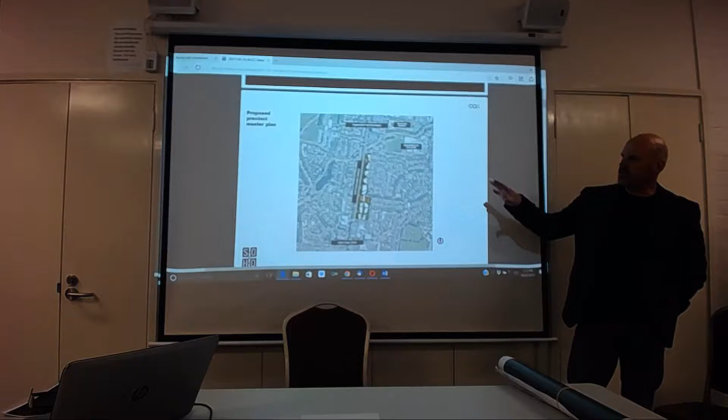The land was bought at auction last August, and we're working up the estate development plan and the first stage development application. Tonight we're here to give you an understanding of where we're at in the process, some time frames, the key elements of the proposal, and we're happy to take questions, probably best held to the end. We'll start with our development intentions plan.

We've consulted on this reasonably broadly - we've had a few community consultations and public presentations at the Pavilion, the last just last Wednesday night, and we presented to the council at a closed forum earlier in the year.

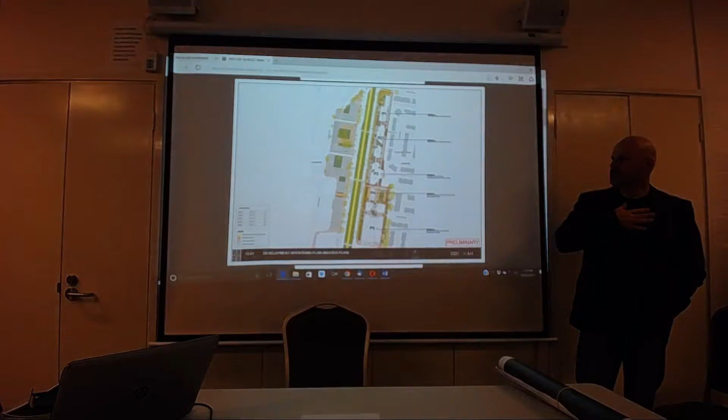The context for this planning is a relatively unique one - we're a bit ahead of some of the policy and aspirational changes the Territory is currently proposing, which brings complexities to how we put the proposal together, particularly regarding stakeholder engagement.

We're working through the Office of the Coordinator General, a bit of a different way to go about things, consulting broadly with all the Territory departments and also the NCA. What we'll show tonight has been through that process for about 6 months, culminating in a proposal we're putting together to lodge around the end of next month, the end of June.

At the end of June we want to put in the estate development plan and the first stage development application, which is at the southern end of the site. That will run its usual process and be available for public comment.

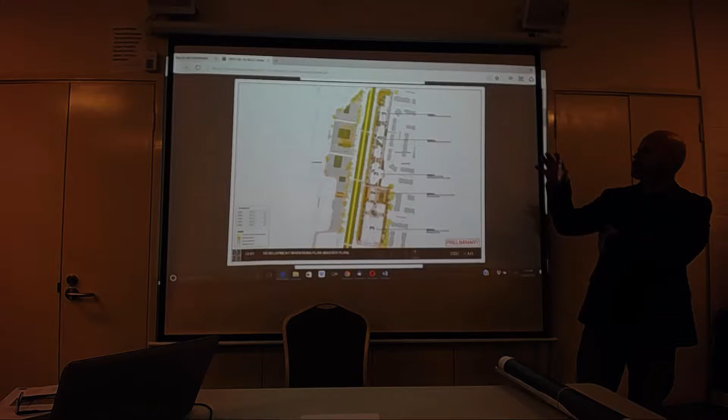You can see there are 5 P stages set up - they're essentially precincts, so we're calling them precinct 1, 2, 3, 4, 5. The development intentions plan works conceptually with a number of individual leases. The current site is held under a single holding lease and a deed of agreement with the Territory, so we have obligations to deliver infrastructure, public connections, pedestrian access, and a privatised road network inside the site.

Northbourne runs up that yellow spine there, where the light rail network will be constructed in time. Dooring Street is out to the rear, and this is currently Karuah Street, which runs through the centre of precinct 5. That street is being de-gazetted by the Territory so the land comes without any infrastructure needing to be retained.

There are a number of heritage elements being retained under a conservation management plan within the site. The first is the 4-storey bachelor flats up near Morford Street, which you can see currently in existence behind the hoarding, relatively in isolation - that's being maintained. The maisonettes, the three-storey maisonettes fronting Northbourne, are all still there at the moment, sitting down here. The visitor centre sits in the middle there, which stays until last.

And then we've got 4 garden flats at the back, so those lighter coloured elements there are being maintained as heritage samples, or representative samples, of the former stock that was in existence over the whole site.

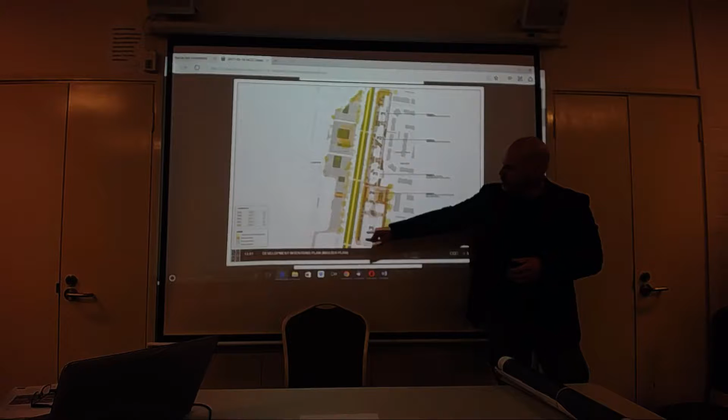Yeah, so the full length from Morford all the way down to Wakefield. There's actually no access off Northbourne to our precinct 4 or 5.

It all sort of drains back out in front of P3, and that's all of the access on and off Northbourne, with the exception of some service vehicle type arrangements that we'll show you a little bit more in the southern end of precinct 5.

The majority of traffic is dealt with in Dooring Street, and that's something that's been mandated to us by the territory. They are trying to take all of the traffic off Northbourne and put it into the rear streets.

So that will happen. There is the opportunity for a left in off Northbourne, just to the north of precinct 4 there, should we be able to get a drop-off zone for a hotel type use.

Other than that, pedestrian permeability and connectivity, which is a requirement under our deed, so bringing people from the eastern part of Dickson across the site and connecting with the light rail corridor.

I'm sure those of you who have looked into the recent announcements of where the stops are will realise that there's one essentially where the motor registry is currently, or where the bus interchange is going in, and another one down at MacArthur Avenue or Wakefield down on Northbourne.

There is the provision for, so we're told by Canberra Metro, a potential light rail stop should density require and should the activation require, just out in front of P2 there. So that's essentially how that sets up.

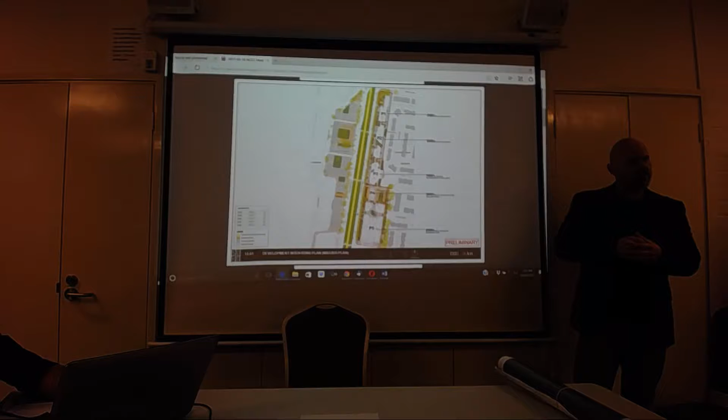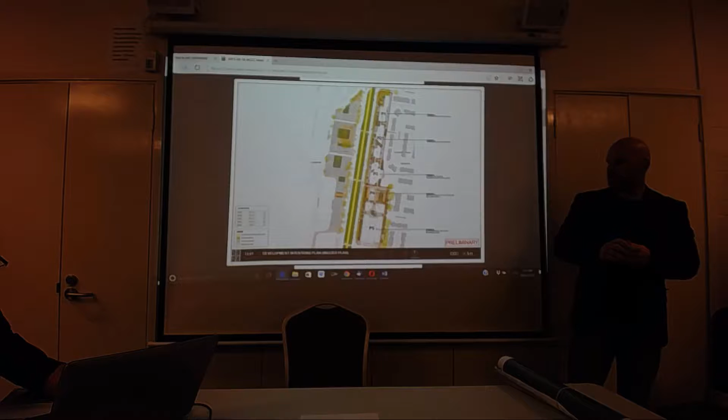The Estate Development Plan, for those who haven't seen one circulated or had the opportunity to comment on one, is largely the technical aspects of the site, servicing it, dealing with all the infrastructure that needs to go in, all the stuff that goes back to the utility providers, the asset managers and the like. So it's largely dealing with infrastructure and services.

You'll see some blocks cut up into those 5 precincts, and some access and egress arrangements. That's where all the traffic reporting will come in. So we're busy modelling traffic at the moment to look at what the impacts are on the local network, and we're working significantly with TCCS in terms of what that's going to do to some of those local intersections.

Who's doing the traffic modelling? SMEC are doing our traffic model.

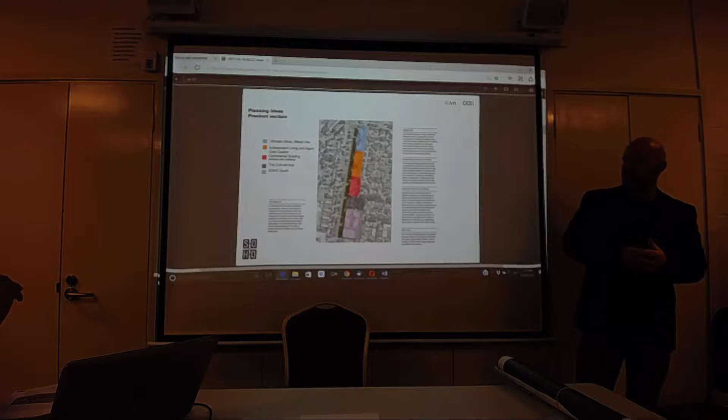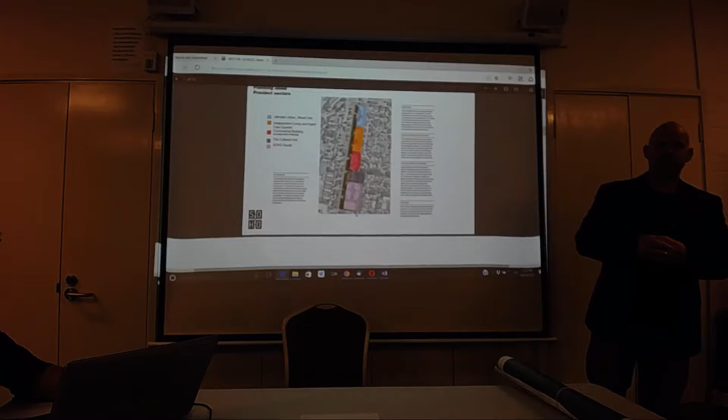This is just a use map, effectively, which goes into highlighting those different colours for the different uses, which is what I just went through on that development intentions plan. So I won't go through too much more detail on that. But that's essentially how the estate is set up, and it hasn't changed significantly over the past 6 to 8 months of consultation.

We're now moving to Precinct 5, which is that southern end. Just to confuse you a little bit, we've reorientated it for best fit on page, so Northbourne is now at the top of page, and Dooring Street is at the bottom of the page.

You can see on the far left of page is where we've got our service and access arrangements, primarily through from Dooring Street to Northbourne, dealing with retail delivery vehicles, waste management and those sorts of things. So to the left of page is the Pavilion Hotel. Through the right-hand side of the page here, ghosted out, which is not part of this development application but we're showing for context, is the Heritage Precinct - the 6 3-storey maisonettes and the 4 garden flats out the back.

You can see just in the centre here that's the proposed envelope for a hotel, but as I suggested before, completely subject to acceptance and direction by Heritage ACT, because it's got some curtilage incursion or some encroachment to deal with there. This is a ground floor plan of the retail network.

All of the blue spaces there are retail tenancies. What you can see up in the top left corner is a 1,000 square metre space with some back of house arrangements there in dark grey. That is set up for a mini major effectively, so a convenience type store. We're currently assessing interest in that sort of space at the moment, which would be essentially an anchor tenancy.

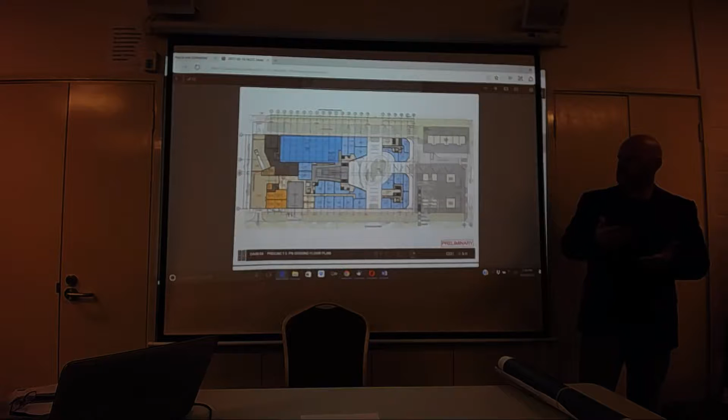Into the centre here, which is an internalised retail mall, if you like, with a glass atrium roof to let in natural light, and some of those internal retail spaces which we think will complement those sorts of convenience arrangements, for what we currently encourage health food stores and those sorts of tenants.

Services and back of house to the bottom left of screen, currently setting up waste management rooms, which will all be dealt with from the basement up internally and collected maybe a couple of times a week. We're currently talking with TCCS and ACT No Waste about how that's going to function.

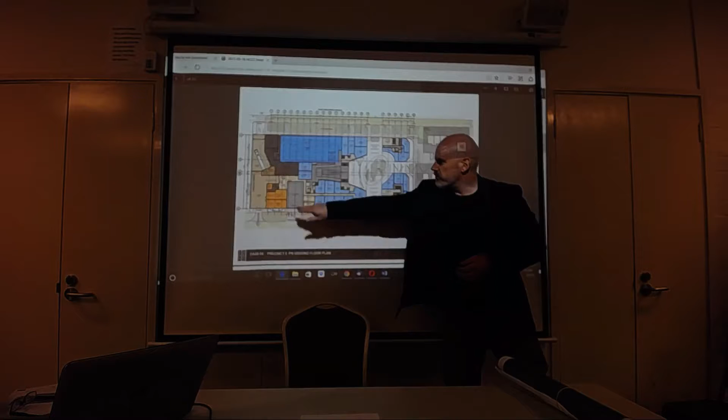You can see right next to that is the basement car park access and egress. So all vehicles to this building are coming down Dooring Street and into and out of that ramp. That's a pretty significant sort of ramp. There are 3 basement levels - I don't have those for you tonight, they're currently work in progress. But effectively a first level that deals with all the commercial and retail visitation and residential visitors, and then 2 full levels of basement parking for residents below that.

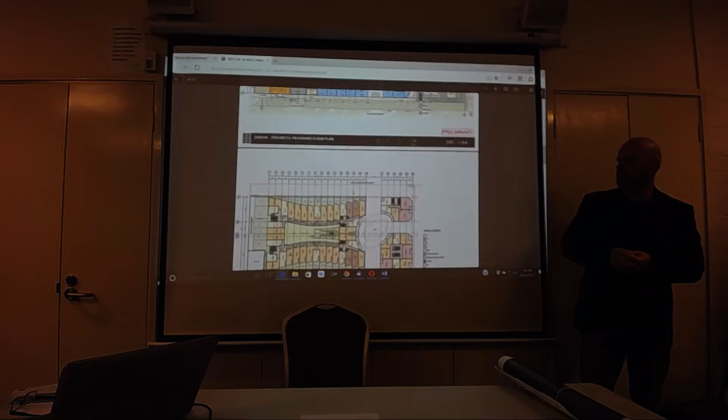This is level 1, working its way up, so you can see that active podium through the centre. The building is set up such that it's effectively what we call single loaded, or it's set up like a donut. So all of the apartments on the larger building - and you can see there are 3 individual buildings, one larger one to the southern end of the site, and 2 smaller boutique buildings further to the north - around that central courtyard, or that thoroughfare, the plaza. So some circulation space through the centre of that building, so all of those apartments face out, either east or west.

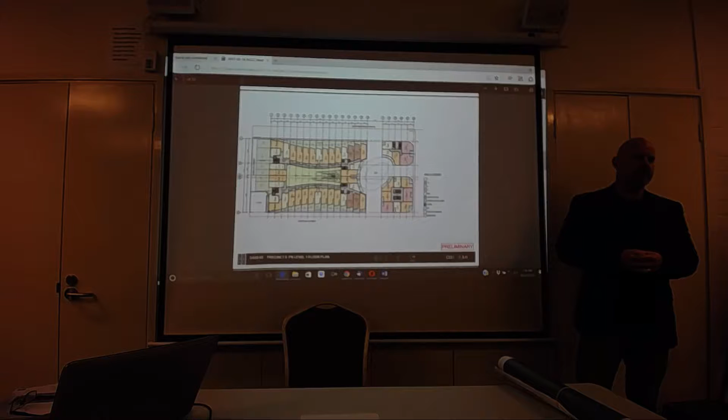As we move our way up the building, you can see there's a couple of joins through the centre—effectively 4 cores in the larger one, a single core in each of the smaller ones—setting those up so they're all the way through to the basement and accessible via residential lobbies that come off this plaza for pedestrian visitors.

That's where we get up to the top, setting back to Dooring Street, moving our way up to 25 metres along the Northbourne side, and we're consulting with the NCA about how all of that sets up. As you can see, we're diminishing over those last 2 and 3 levels with the interface to Dooring. At the moment, depending on where you measure from, somewhere between 18 odd metres along the back side there, 10 metre setbacks to Northbourne, which is a requirement under the deed, and that's a heavily landscaped zone effectively mandated by the NCA.

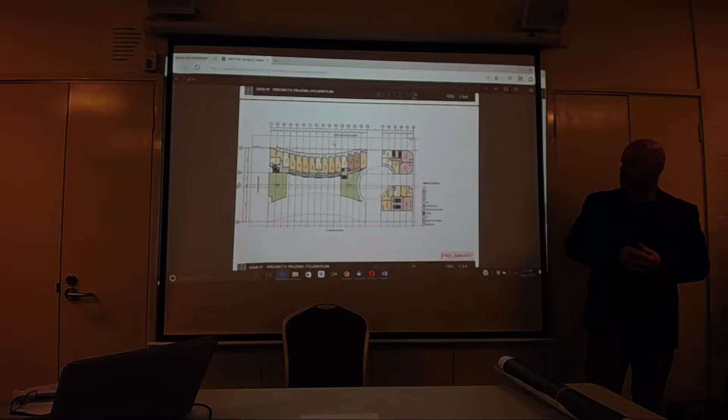And a generous setback—I can't recall the exact setback to Doring, maybe 6 metres to the boundary at the tightest point—and then as it concaves back in, it obviously gets set back even further. So we're currently working on integration of levels through Dooring Street.

As you know, it works from a high point, sort of around where the basement ramp is, down to a lower point as we move through that heritage precinct, which is causing us a couple of issues around servicing, particularly stormwater management, and getting some of those shared services down the Doring verge, and what that does to the existing network and how we manage vegetation and verge replanting, etc.

So that's effectively how Precinct 5 is setting up. As I said, we're moving through coordination of that with all our services consultants, and our landscape architect is yet to get a start, but they'll be working on that central plaza arrangement.

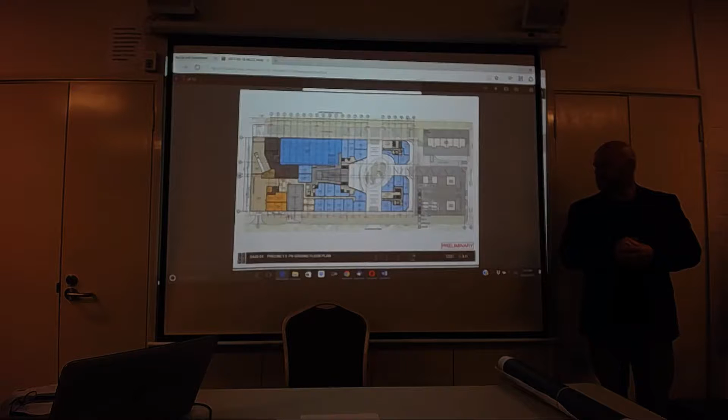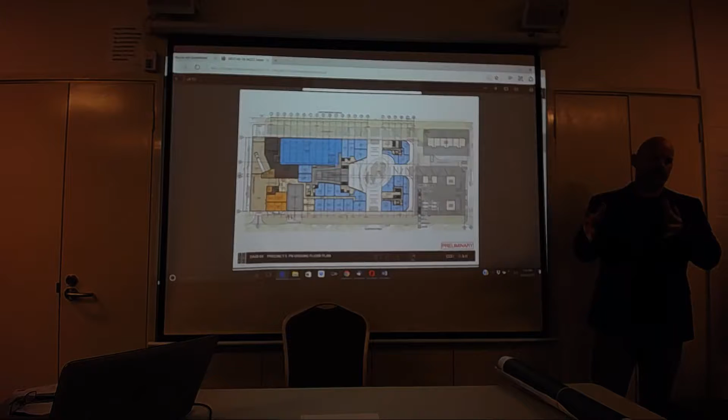Just to recap on the timing, we're looking to put that DA in somewhere around the end of next month. We're running the design and siting development application for Precinct 5 concurrently with the estate development plan, and that'll be circulated through all the agencies by the deed manager.

This one will be assessed independently by EPSDD, with their agency endorsements. So that's about all I really have to say, but I'm sure there'd be a couple of questions, and I'd be more than happy to take them.

Yeah, how high is it going to be? 25 metres to Northbourne, which is the cap along Northbourne depicted in the National Capital Plan by the NCA. So that's about 3 stories. No, it's retail plus 7.

Yeah, it could be 9, but we're at 8. You're at 8 stories, 8 stories.

That's pretty tall. So how are you going to deal with overshadowing, when that westerly sun comes in—you're going to be overshadowing right across Dooring Street, aren't you? No, and we'll have to demonstrate that is the case when we put our shadow diagrams together.

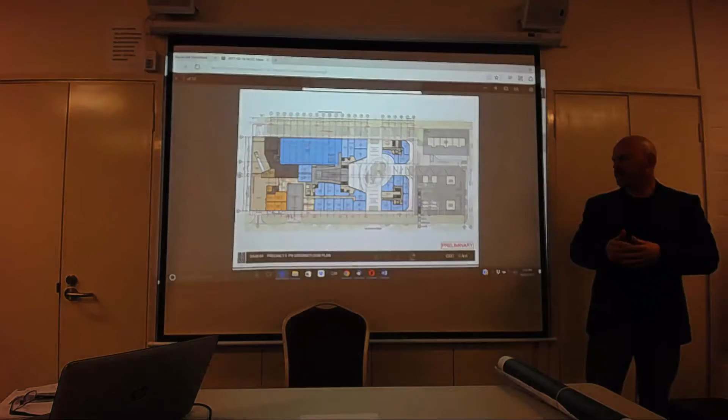The way shadows are necessarily calculated—there are requirements in the territory plan about how we calculate those. But once you get into—isn't a shadow a shadow? It's how you're supposed to calculate them to be compliant.

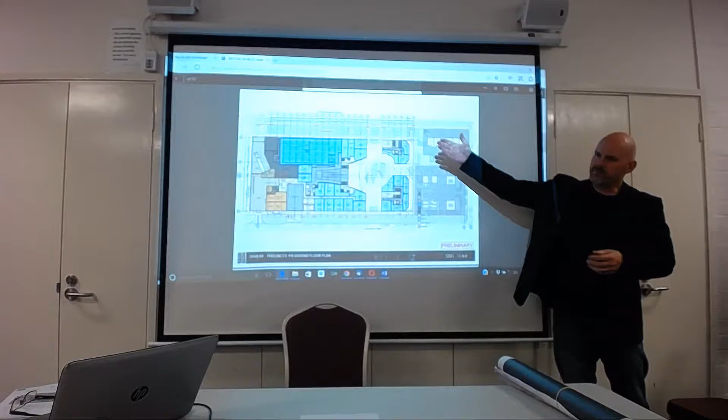Is my point—once the sun gets around to the west and it is setting, then the eight-storey building is going to cast a long shadow. Yeah, but it's graduated down from Northbourne and steps its way down to 6 stories towards the rear.

And so how many residential houses have you got on the other side of Dooring Street? It's a good question, I haven't counted them, but there's quite a lot. There's a few, yeah, so quite a lot.

So they're all going to get overshadowed, pretty much like all the folks in Oliver Street over in Lyneham got overshadowed. Well, not at 3 p.m. they won't be. Well, they get a pretty severe overshadowing—it's pretty terrible really, if you go and have a look.

Well, we'll have to demonstrate that through our DA, and you'll get a chance to comment on that, as will all of those residents. It will be a significant impact on the housing in Dooring Street—not necessarily the overshadowing, but particularly the traffic.

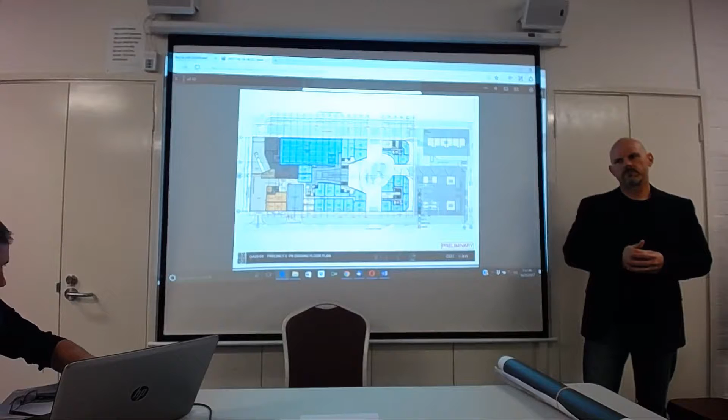That's the experience we've had in Forbes Street in Turner, where there are some big buildings that went back where originally there were just houses—two-storey houses. And it's a similar sized road to Dooring Street, one of the smallest size roads. The residential amenity of the people on the east side of Dooring Street is going to be fairly screwed.

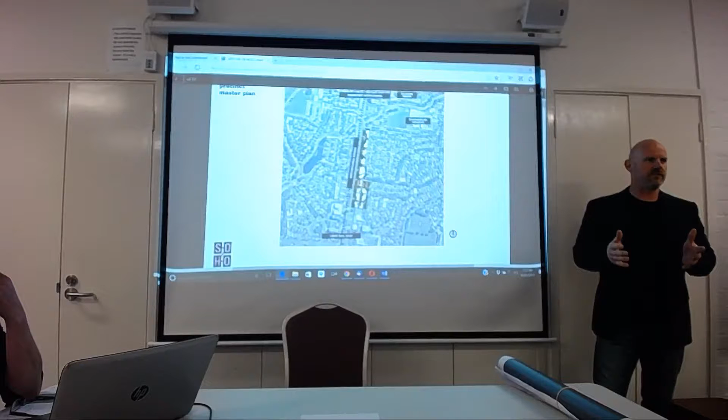There's no recoiling from the fact that Dooring Street is going to be a vast change from where it is today. That is something we've tried to discuss with the Territory. The Territory are creating policy that is effectively trying to turn the residential streets into more of an active travel network, their words, and turn Northbourne Avenue into an uninterrupted boulevard of light rail, pedestrian, cycle traffic and through traffic. So that's a policy decision in which we're working, the same as you'll be commenting. You're more than free to have your comments back to that proposition, but that's where we're being effectively mandated to put our traffic.

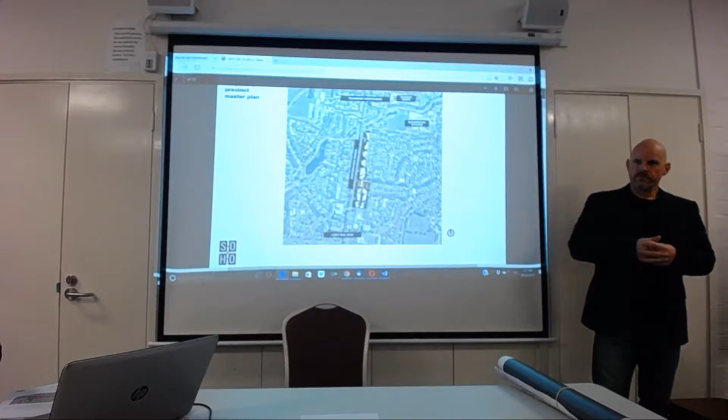I just had a quick question. I'm not sure if you covered this because I had to leave the room, but on the diagram of the units, it looks like you had a small sliver on the north side of each unit. Is that a design feature? They're balconies, right? Oh, that's going down the side, in between each unit. Is that right? Yeah, the vertical slits. There's a couple of different plan options that would explain that, but it's effectively to get light into bedrooms, so that's creating the opportunity to make that happen and get those to work as 2 bedrooms with a single frontage.

I was hoping you could talk about the solar access. So the minimum 70%, what's the performance on this? I'm counting 5 fully north-facing units. Yeah, the way that it's set up and the angular arrangement of the east and west side is to maximise solar orientation so that we can get most of those units their 3 hours of solar access to the living rooms on the 21st of June between 9 and 3.

So in relation to the requirement for 70%, what's the percentage that... Well, full compliance, we're aiming to well exceed the 70%. We find with developments like this, rather than if you put your long frontage north, then half the units get great sun and the other half get no sun at all.

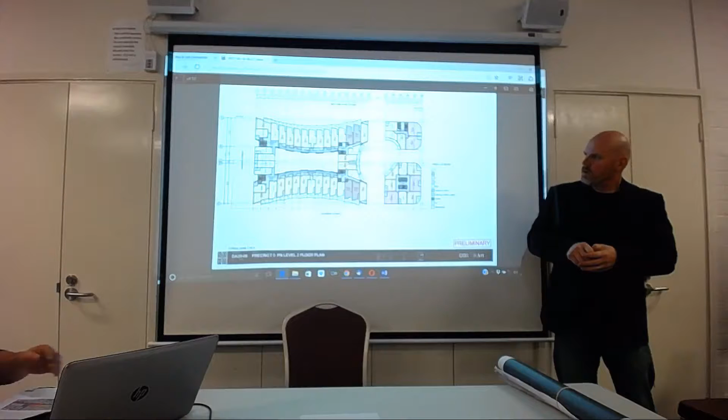What's the size of the shops? What square meterage do you have? They're all circa or just under 100 square metres. The current territory plan mandates that we can't have tenancies larger than 100 square metres, with the exception of that one larger tenancy that sits within a space in the old cadastre that breaks it up, that we can do. But the rest of it, these are all circa 100 square metres or slightly smaller.

Are all eateries what you're going for, or is it retail? What are you looking for? Well, again, this is an issue with the territory plan. It says we can only have two uses, pick your two, and that's all you can have. So it's a little nonsensical, and probably an unintended consequence that needs to be addressed. We've been talking with the EPSDD about how they set up their strategic direction on the corridor to effectively put something in there that's going to be of more use. If we sell the first one to a small office and someone else to a cafe, you've got 20 offices and cafes, and that's it, so it doesn't make any sense. At the moment, they're set up in such a way that they're compliant and we can do a DA. But what we'll try to do, either when it goes to market or when it's delivered, is have that anomaly corrected in the territory plan, so there can be an array of uses commensurate with more activation of the space and communal benefit.

When are they looking to go to market? Commercial tenancies don't usually go out as early as residential, because people like to forecast their business into something that's almost turnkey ready. So they won't be on the market for a couple of years, I wouldn't think.

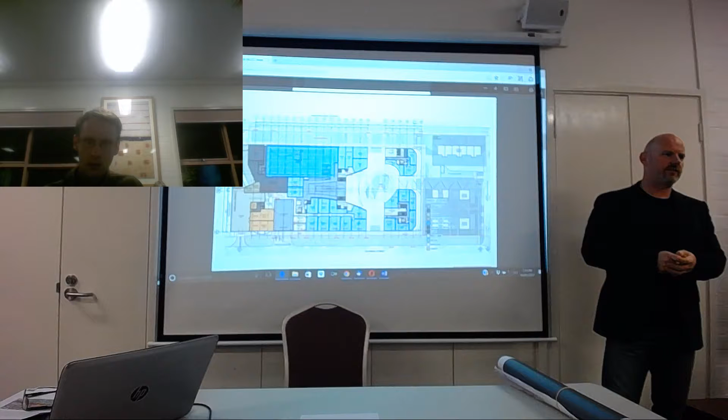Some of the work we have been doing that may have gone unnoticed, outside the usual scope of community services, has been the tenant relocation project we've worked on in partnership with Housing ACT. That's because of our long-standing relationship with the tenants and families living in the public housing complexes being demolished to make way for redevelopment and new buildings. We are the lead partner leading tenant engagement in each of those public housing complexes as the schedule of demolition happens. So our team on the ground go in with Housing ACT very early on and work with tenants to make sure they are respectfully and appropriately informed and have their preferences for where they'd like to live adhered to wherever possible.

We not only support them in the relocation process but make sure they're settled into their new suburbs and areas respectfully with the support they need. Sometimes that may mean that for an older person who has services they've really valued over the years, those services will travel with them. So if they had a home support worker, we'll make sure that worker goes to Gungahlin or, if possible, down to Tuggeranong if that's where someone's relocated.

In other instances, it's just about connecting people to community. A number of tenants have been moved within the Inner North because this is their community and has been for years and years, and some people have been moved out. But we're particularly proud of that project because despite different media and press that comes out, it's probably been one of the most valuable and respectful processes I've been involved in as a community services professional for 20 years. The outcomes, if you get an opportunity to read some of the case studies or see some of the interviews with tenants affected, are pretty moving and very worthwhile taking your time to look at.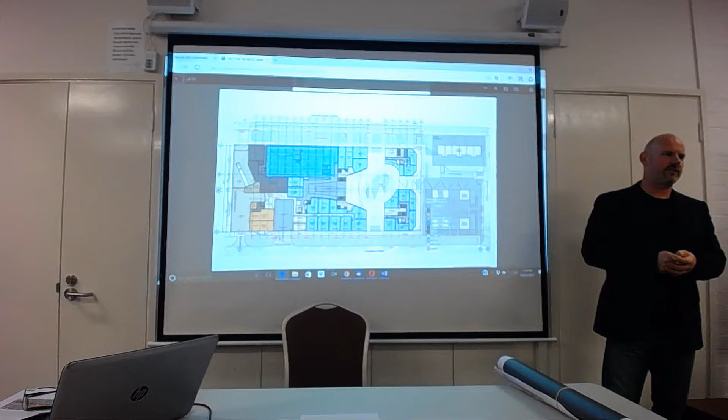One of the other projects Northside is a key partner in is the Common Ground project. Common Ground is building out in Gungahlin, and it's based on a housing first model. Dennis, I think you've spoken about Common Ground at previous meetings and the possibility of different locations, one of which bandied around has been the Inner North. Common Ground is a housing first model where you combine low income earners paying affordable housing rent with people who have experienced chronic homelessness, creating a building that fosters a vibrant community with services located on the bottom floor to make sure everything works well.

It started in New York and is based on the old concierge-type New York buildings, where you have a concierge at the bottom making sure everyone's well and everything runs smoothly, creating a really great community feel in the building. Common Ground in Canberra, as we said, is in Gungahlin, and we work quite closely with the Gungahlin Community Council, who have been fantastic in making sure that not only was the architecture of the building stellar and beautiful, but also that the tenants and families living within that community were welcomed with open arms into Gungahlin.

If you haven't had a chance and you wanted to find out more, you can look online at the Common Ground website. If you're personally interested, I'm more than happy to speak with anyone and give a discreet guided tour, or let you know if any more discussions around Common Ground coming to the inner north take place as that eventuates.

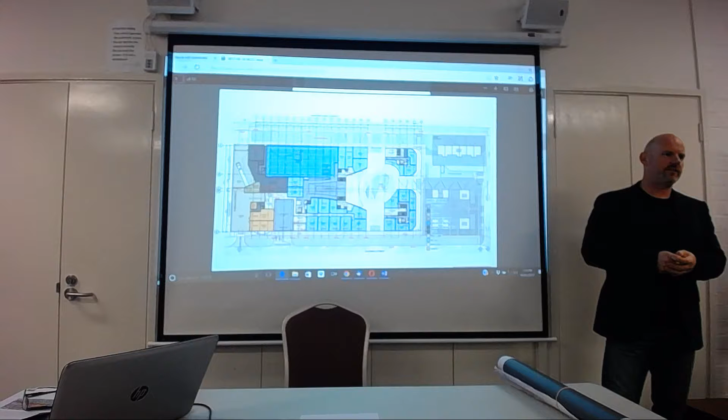Northside has both early education and care centres, community services for people facing difficult circumstances, and facilities that some groups hire. If you haven't met the community service Northside team, we also provide support to community groups, whether that's auspicing smaller groups trying to get a project off the ground. A good example is Lynham Commons.

The Lynham Commons group is starting an orchard over in Lynham, and just needed an incorporated association to help them get grant funding to get that up and running. Or it's lending some social media support to the Dickson traders as they invigorate the Dickson shops, or lending our support to the Majura Men's Shed so they can operate in an environment where they concentrate on the shed rather than insurances and things. That's the sort of thing we do.

I'm happy to take any questions, but I thought it would be a good opportunity for you to meet one of the Northside team. There's around 160 of us, and we work with around 1,000 community members across the inner north every single week. So if you ever have anything you'd like to discuss, please come in and have a chat.

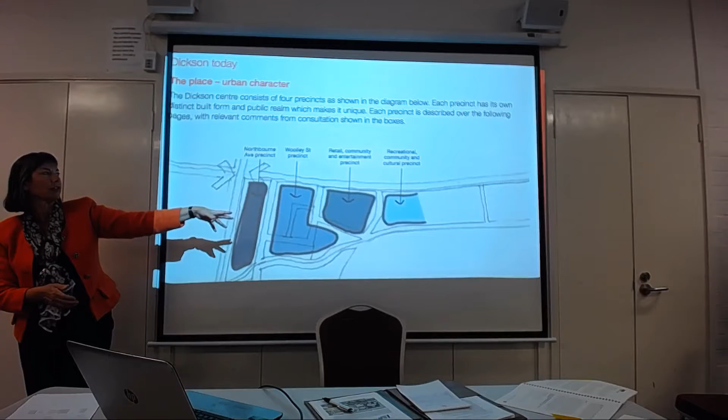So unfortunately the screen, I don't know if it's possible to twist it, the display slightly. I'd need to do it up there, but it doesn't...

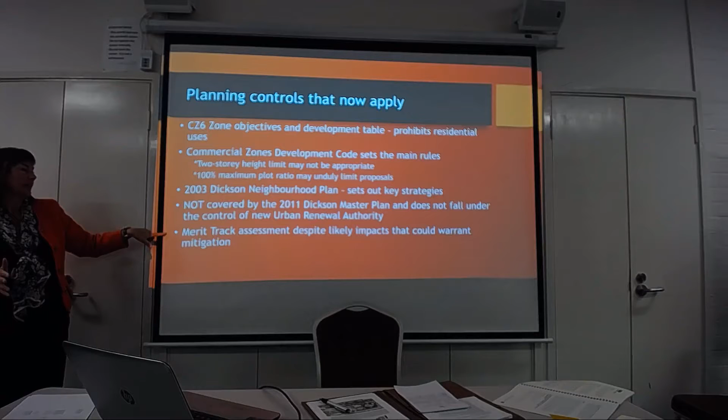Anyway, it is likely to attract merit track assessment, and any proposal in Section 72 is likely to fall into the merit track. However, there could be impacts if this land were developed - let's face it, any development here is likely to have impacts, and it's not clear that they would actually attract the scrutiny that might lead to them being mitigated.

The CZ6 zone objectives - look, for most people this is boring as hell, but for town planners, this is absolutely where things are made or broken. This is what any development on Section 72 is supposed to comply with, and if it doesn't, there are strong grounds for overturning that decision in ACAT if necessary, but obviously what's desirable is that it actually does comply in the first place.

I won't spend a lot of time on that. What I want to really talk about... Sorry, Jane, that did mention accommodation. Yeah, that's what I was asking. Mentioned accommodation there. Oh, sorry? That's not... oh, it, yeah.

It talks about accommodation as leisure and accommodation, and what it's talking about is hotels. Hotels, service apartments. This was basically designated as being about entertainment, accommodation and leisure. The idea being, you probably remember, in 1959 the first motel was on the corner of Northbourne and Antill Streets. Yeah, I stayed there a few times. This was regarded as the gateway, and therefore it was necessary to put in tourism accommodation.

Does Northside Community Services satisfy that zone? Oh, as community, absolutely - yeah, community services.

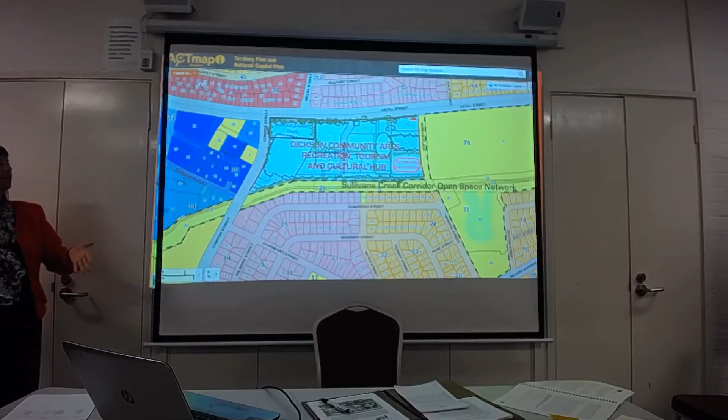This is just a wish list. At the end of the workshops we attended back in 2014—you probably all know I do the Dicksonia Magnifica on Facebook—I threw this up as one possibility. You might put a park up here, you might put an eco-housing demonstration over here, you might do something to actually create an open space network along Sullivan's Creek that delivers a lot of other benefits, and you might actually make this into an integrated hub. But you've got to talk to people, and you've got to actually listen.

So that's all for me. I have got to leave in 15 to 20 minutes. But I really wanted us to have a chance to talk about what could happen here, because the Common Ground project is likely to require a draft variation if it's going to go ahead.

What I'm worried about is the approach all along to Section 72 has been piecemeal—here's an opportunity, there's a bit of vacant land, a fire happens, suddenly there's some more vacant land. Well, really, this is the natural capital; we should be managing this. And the planning needed to pull it together seems to be missing a lot. So I'd like to make sure we're actually on the front foot and designing so that we actually get the outcome we want.

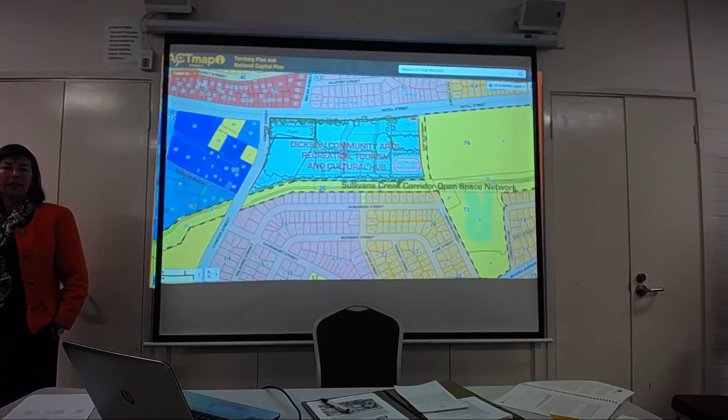So Jane, from those early meetings back in 2014, when it was on the front foot and it looked like something was going to happen, why has it gone quiet? What's the real story? I don't know, is it just too hard for anybody else to handle for the government? If anybody lives in Dickson, you would have received one of these flyers.

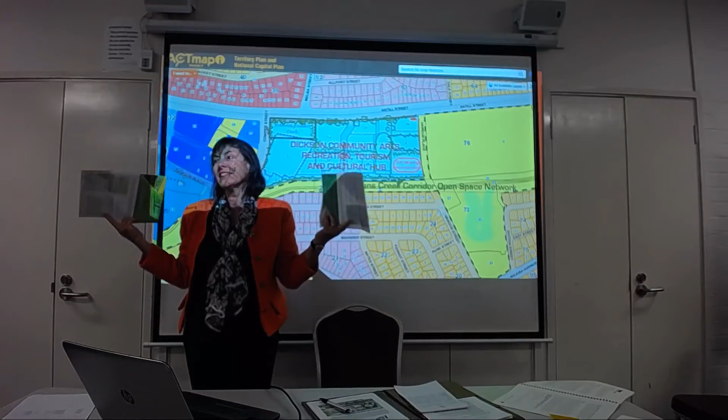That's the last we heard. I don't understand the way things are done. The previous development, all of those workshops, that was all driven by housing.

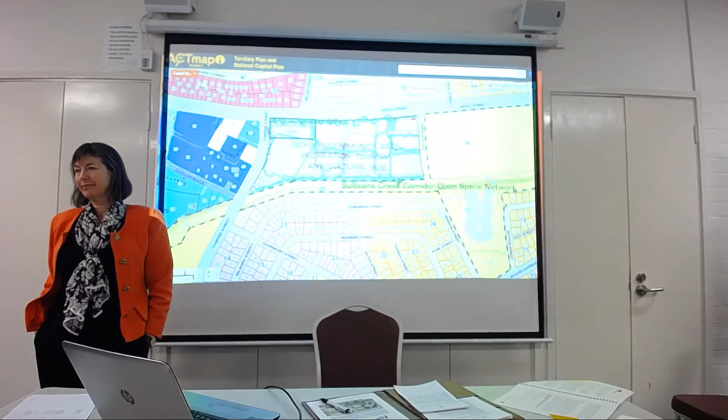The real answer is that we had a number of strategic meetings from an NCCC point of view with housing. Their fundamental view was, unless something underpins the revenue it takes to redevelop that land, that the government could get some return out of, they're not interested in developing the community aspect of it. What actually happened was what was driving it at the time were about 200 housing units, driven by housing's need to accommodate low-income earners and underprivileged throughout Canberra, and they saw that as an opportunity to take the whole precinct and divide it up between what they classified as what they would do for the community and what they wanted to get out of it.

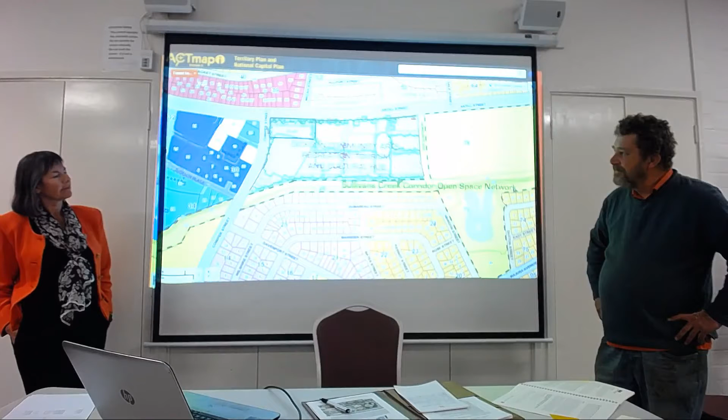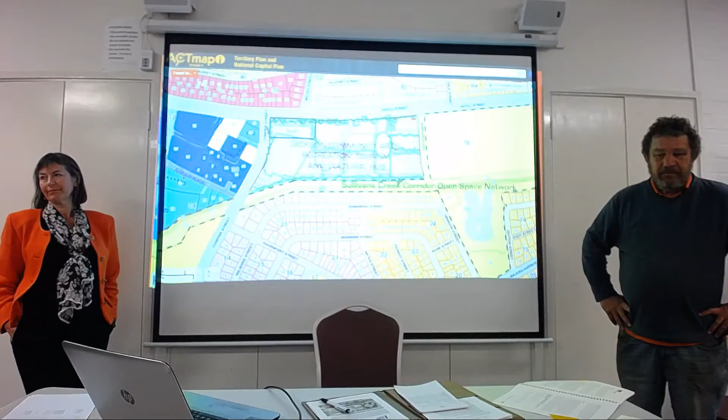The problem was there were 2 workshops, 100 and something people put input into those workshops. All the ideas were listed, and the architects employed by housing dropped back on the table a set of drawings that you'd think were living on Mars. It was completely different—what they drew were 8-storey buildings, and to hide the impact of those buildings was a row of trees and a path at the bottom corner where Jane's drawn that row of trees. What they were giving back to the community was a couple of paths, and the rest of it was going to be buildings. It was such a major departure from the 2 workshops that the conversation went, 'you've got to be kidding.' They went into this 'it's all too hard' basket, and then the whole thing went completely quiet.

So the fight you're always going to have is to do anything that turns that into anything cultural. There has to be some sort of trade-off where the government will underpin the development of the community aspect with a return for the government. At the time, it was 200 and something apartments. That could be scaled back, but you would have to enter into a conversation with the government to work that forward. At the moment, it's gone back into the too-hard basket and disappeared off the page. That's kind of roughly where things are at.

There was one more development—that was our famous mid-2015 meeting, about the right year. Yeah, where through Jane we asked and asked and asked for meetings to find out what's happening. Suddenly at the last minute there was a meeting, and about half a dozen of us, maybe a few more, went along. That was the infamous meeting where we went along and tried to put more ideas back on the table, and they were sort of talking it through, and then we all went home and discovered as we left the room a button was pressed somewhere, and a media release appeared.

Because I was sent the media release, and it must have arrived in the time it took me to walk home. Yes, and the headline was 'Dickson Development Gets Nod.' Yeah, that was at the very, very end, right? There were meetings before that. What I'm saying is the reason. No, there were no meetings before that. Yes, the meeting that Jane had run. I was at them, this particular meeting. I was at that. And I'm just saying, I was at the meetings before and I was at that meeting. What you said happened, but I'm saying housing drove a series of meetings. No, I understood all that. I'm just saying that in the process there was one more thing.

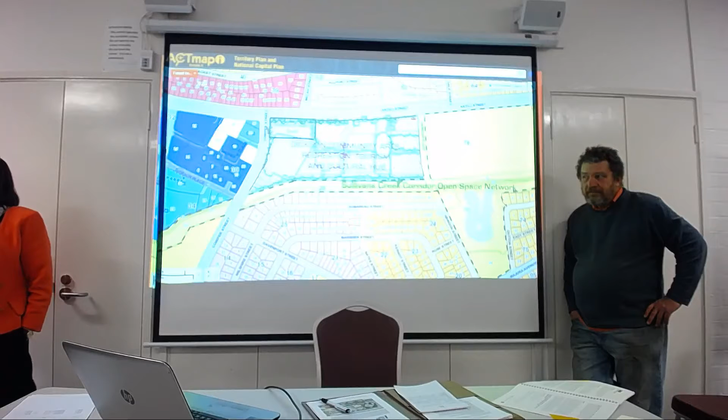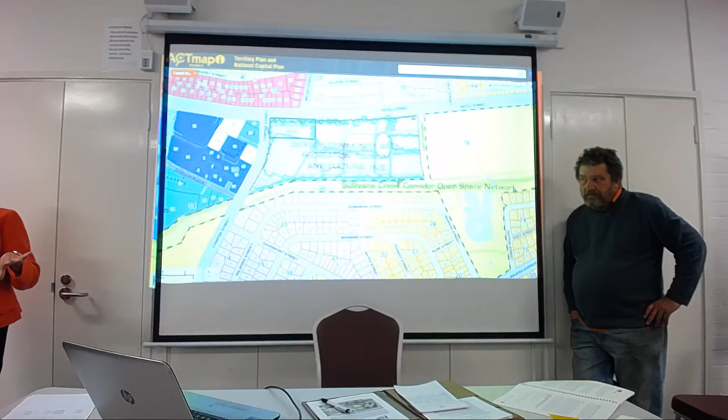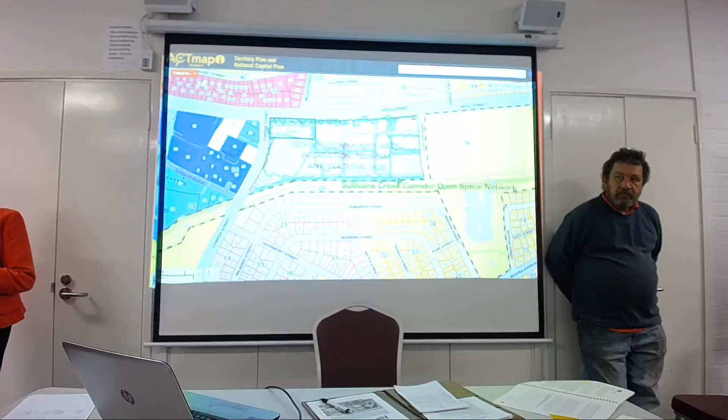Is it possible or not possible? Well, what I'm concerned about is if it becomes a standalone project. If it doesn't actually integrate with everything else that's in Section 72 and with its surroundings, then you end up having an enclave. Well, that's the only thing they could possibly design. The other big fear is if they pick it off in pieces. Yes, right, that's right, where you end up with common ground. Obviously, it's not a requirement.

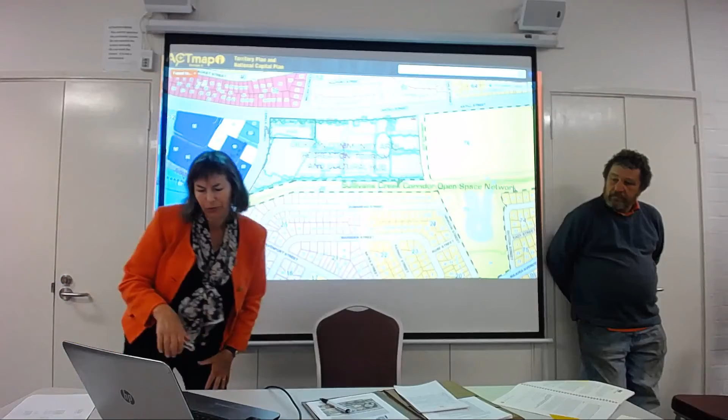That's right. And the truth is, if I go back to the aerial, there we go. There's now a lot of land in here. So this Salvation Army site is empty. Yeah, it's empty. It's been left and vandalised, and then about 3 weeks ago, somebody set fire to it, not surprisingly. And we're not suspicious about that.

So you've got the Downer Club site, with the Salvation Army site, which clearly has the capacity for some sort of a driveway access off Antill Street potentially.

In terms of redevelopment, the reality is that's a lot of land, and the LDA controls certainly blocks 25 and block 6, and I think has either already secured or is about to secure block 22. I understand that negotiations on the government getting this land are currently underway. They haven't actually been finalised. I don't know what, if any, sticking points there are.

I mean, it's really a shame that this building has been burnt, because in fact it was potentially the sort of building that you would use as a community centre.

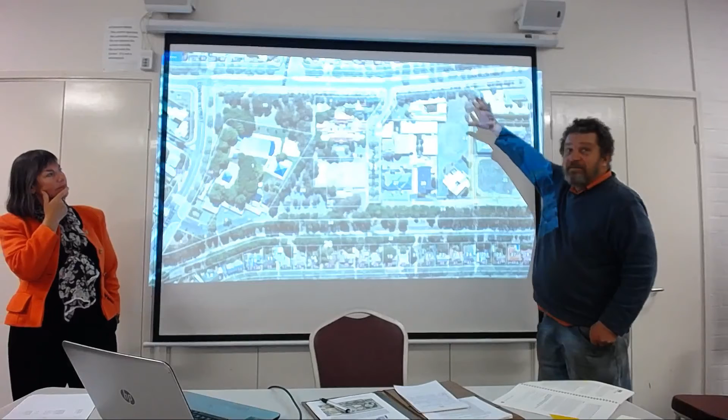Would aged housing provide enough revenue and still retain a community hub, that feel of what's supposed to be there? It seems one of the best revenue earners I've ever seen is aged housing. If I were to pick somewhere, I'd probably put some aged housing in this sort of number area. Number 25 has been talked about forever.

Yeah, ever since the fire. From what has been done before, and from what all of you have said, you have to put revenue with this, right? Then you must have some concepts of what that means. I know you did originally state there was one, but what realistically can be done that would be in sympathy with these concepts.

You're thinking, and I only say that because I'm an accountant and I understand this money thing. You know, we like money. One of the few, okay. No, I just like money because that's what accountants do.

And I get the idea that it's got to pay for itself, but also looking at the demographics of this area, the ageing, and Goodwin's booked out, so is the one down in another area, and I've got to find somewhere to live, okay? I'm not that far away from that, so I'm just setting myself up. So I'm thinking the best thing would be compromise, and maybe in the master plan we come up with, to get government on board saying, what is there a need for that is also a revenue earner, that is actually needed by this community. And I see no reason why the aged thing, because we don't want people to go to Queensland anymore.